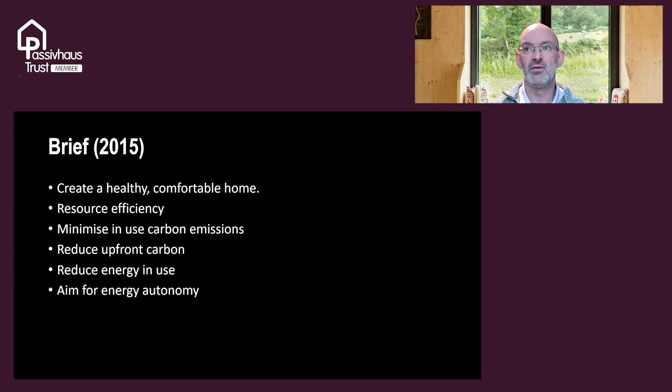So the basic brief from Paul and Sonny Shepherd was to create a healthy, comfortable home by converting an existing barn into their new residence, to focus upon resource efficiency. So we wanted to be thinking carefully about the materials that were being used and specified in the building, and in doing so, minimising upfront and in-use carbon emissions, minimising energy use, and with something of a view towards aiming for some kind of energy autonomy of sorts. This was a very loose brief that then, as we moved forward, we started to develop and refine into a strategy.

So, in terms of developing that strategy, in the words of Abraham Lincoln, if I had 9 hours to chop down a tree, I'd spend the first 6 sharpening my axe. So it's really a case of getting to grips with the core issues, and preparation is the most important phase. So getting that right for us in this particular case meant thinking about how Passivhaus EnerPHit could be brought into play. There's a few different approaches to that, which I'll outline a little bit later. And the reason that came in is because it provides and anchors a very good standard of health and well-being and comfort.

I have a little metaphor where that kind of health and well-being comes in cans, and that's comfort, air quality, and noise, should we say? So if we address that, and we can use the Passivhaus EnerPHit's low energy criteria to get the fabric right, then a lot of other good things will just flow out the back end of that, given the client's overall ambitions to really reduce carbon emissions and reduce energy bills.

As I say, we were then also looking at how we might use and reuse materials. So we went through what's a fairly common sort of framework there in terms of recognizing that we wanted to reduce the number of materials that were being involved where we could. We wanted to be able to reuse materials, and there's many examples of that in the project. Where we could, we wanted to repurpose materials if they couldn't be reused in a direct sense, and then also recycling rather than resulting in waste. I'll talk about that in more detail later on.

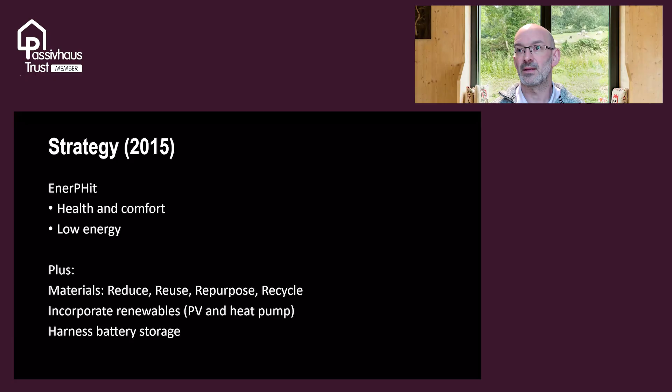So just to get into the strategy for certification a little bit more, when we start to talk about the Passivhaus EnerPHit or any retrofit for that matter, we've basically got three options that we're thinking about when we're dealing with the fabric. We've got internal insulation or external insulation, just to set those diametric poles there, and there's different factors that we need to consider, and then there's a hybrid zone whereby you might have one wall that could be internal wall insulation, another wall external wall insulation, for certain planning criteria or something like that.

And in this particular case, it was recognized that we were going to need to use some kind of internal insulation strategy because the planners had a very specific view about how a derelict barn should appear. I'll phrase that politely.

So when we then started to think about Passivhaus EnerPHit certification, we had two approaches that we could take. We could either go with the space heating demand method, which is a bit like Passivhaus insofar as we're trying to iron out the new build standard, targeting kilowatt hours per meter square per annum, in this case less than 25. Or we could use a component method, which would have meant that we weren't using such onerous U values to achieve the end goal. But the consequence of that would have been that to reduce the overall energy in use and the carbon emissions, we'd have ended up needing larger photovoltaic arrays, and there were question marks about whether it would reduce carbon emissions. I'll get onto that later.

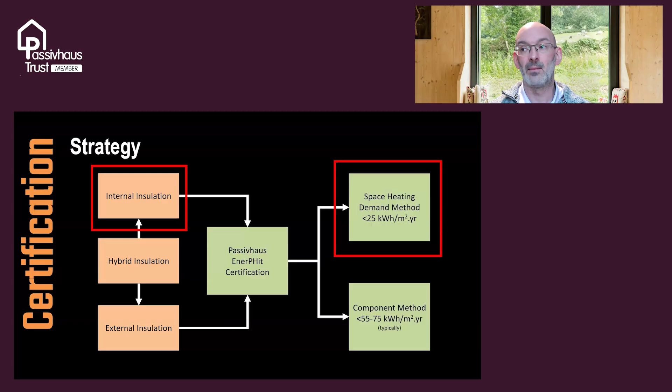In terms of seeking to achieve the space heating demand target in this particular case, we had the virtue of the fact that we had a barn with relatively clear structural spaces within it that we could then work within and introduce our strategies. So that's the context.

In terms of getting to grips with the before, where are we? Well, we're in the village of Lanchester, which is just outside of Durham and not too far from Newcastle, if you know the northeast. There's Shepherd's Barn itself and the land associated with that. And then just north of the site is Lanchester Community Gardens, which is also owned by the client and features in their larger sustainability strategy. And the site itself lies just outside the development boundary of Lanchester itself.

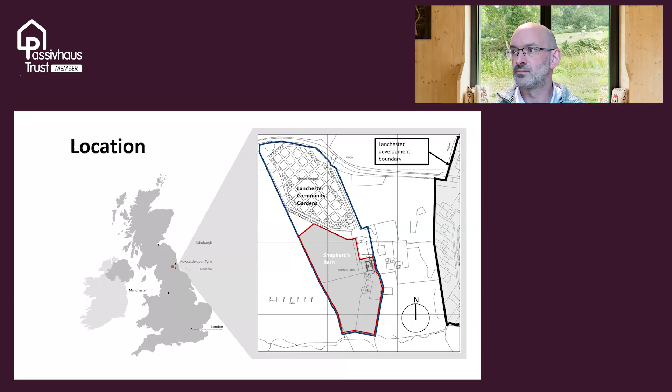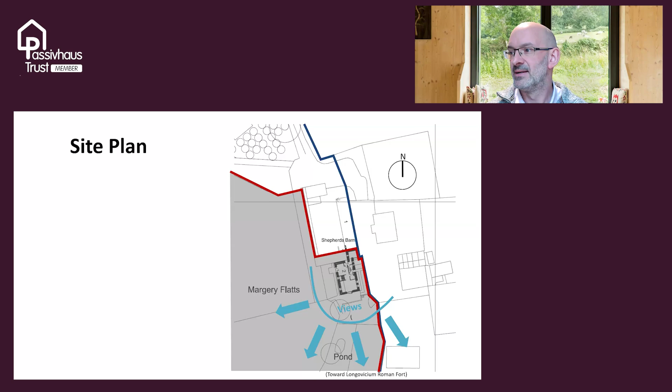The main views really are towards the south, with some over towards the west across some fields. If you're viewing south, then you look across a bit of a valley over to some Roman ruins from days gone by. So that kind of preserves that view in many respects.

The barn itself was nothing special at all, to be honest. It wasn't an architectural gem. It wasn't one of these barns that have very strong architectural characteristics in terms of vernacular. It was, to all intents and purposes, a barn that, as far as we can tell, was built in about the 1920s, 1930s, adapted in the 1950s, and then left to go derelict. So

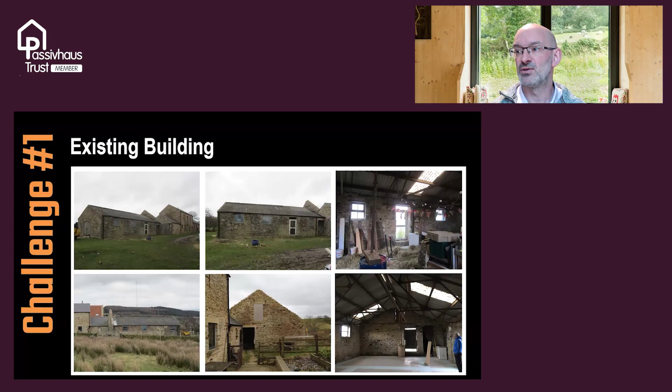the walls themselves were structurally unsound, and as you'll see later, there were major works rebuilding those to make them sound, and there was an asbestos roof, which also posed its own issues. We can't choose the form factor, the shape of the existing building, of course, and that poses specific challenges to us as passive house designers and architects when we're dealing with projects that are retrofits.

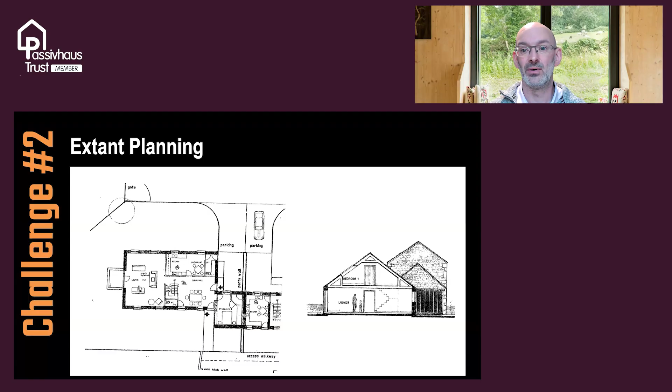And in this particular case, there was an existing planning permission for a dwelling to be formed on the site. Now, unfortunately, when you were a bit more rigorous in terms of looking at the space planning, it didn't actually work. So we had to redesign the floor plans and the sections to accommodate the client's spatial requirements.

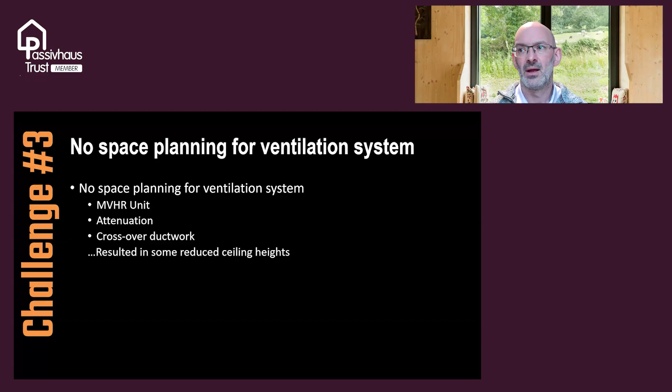And also in that process, the extant planning didn't have any accommodation for mechanical ventilation systems. So we again had to think about and develop strategies for how we can introduce and thread ductwork throughout the structure, and manage ceiling heights in an appropriate way.

Another factor that we wanted to consider was daylight. The barn itself had rather small windows and a limited number of them, in disadvantageous locations in terms of how you could develop a floor plan. And also, we didn't want to overglaze the building because we know that heavily glazed buildings are a lot more prone to overheating risks.

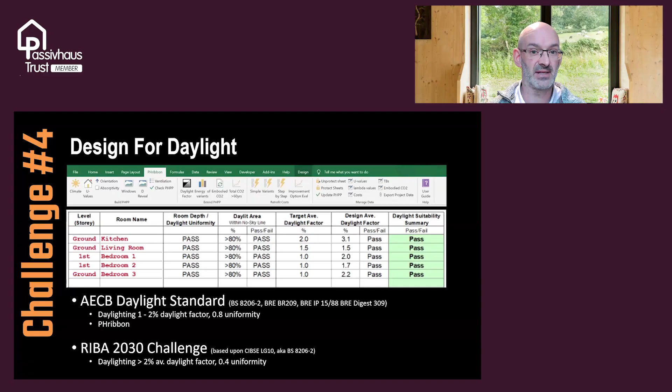So a number of years ago, I developed a daylight calculator that is used in our projects and available through the AECB, and we use that to right-size the windows to make sure there's good quality daylight, and that in doing so the glazing is not oversized and the risk of overheating is reduced. We can then feed that information across into the Passive House Planning Package, which is the software we use when we're designing any new build or any retrofit that's seeking to achieve the Passive House standard or indeed the AECB retrofit standards.

In terms of the performance criteria itself, these are the criteria that we were chasing. I won't get into much of the technical weeds on these for this presentation, though I can come back to it if you wish. But in terms of hitting the space heat demand target, we were seeking less than 25 kilowatt hours per metre square per annum. There's a primary energy demand target that we were seeking to satisfy for passive house criteria.

We wanted the overheating risk to be less than 10% to qualify for the EnerPHit or passive house standard. In general in the UK, we target a quality standard of less than 5% exceedance. And to be clear, overheating is said to occur when you exceed 25 degrees Celsius for more than 10% of the year.

Now, having worked on a number of passive house projects over the years, I tend to do building performance monitoring to find out whether there are improvements to our design process that can be integrated after the fact, so that as we move forwards, we can learn from that. And you'll see that the monitoring in this particular case showed that the design process worked successfully.

Thermal bridging, I won't go into the technical details on that, but the key thing for you to be aware of is that if we don't address thermal bridging, then 50% of the heat losses could be through the thermal bridges rather than through the walls, floors and roofs. And it's quite easy to go wrong on that. So Passivhaus EnerPHit has some good performance targets that we seek to achieve on that. And indeed, we achieved that in this particular case.

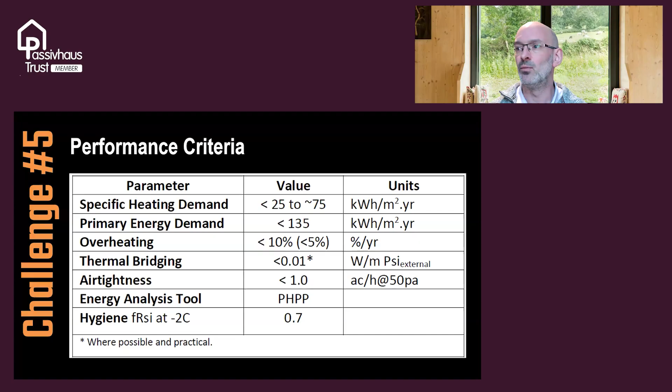And to avoid hygiene risks, so this is the risk of mold growth and things like that, we want to make sure that surface temperatures are sufficiently warm. And I won't get into the finer details of those criteria right now.

But the whole project is assessed using PHPP, the Passivhaus planning package. If you speak to anybody about PHPP, they'll tell you it's basically a big spreadsheet with many worksheets within it. And Passivhaus designers work through that, filling in all the relevant data, so that way we can determine an understanding of how the building will perform in the context of design.

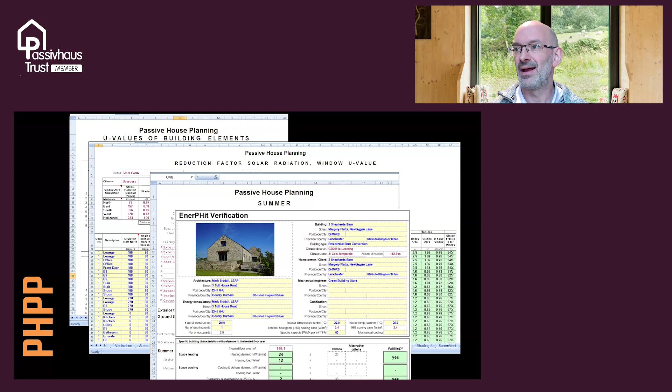Of course, how it performs in practice remains uncertain, and that's where the building performance evaluation kicks in to determine whether there's any performance gaps that we need to be aware of and how they may be managed.

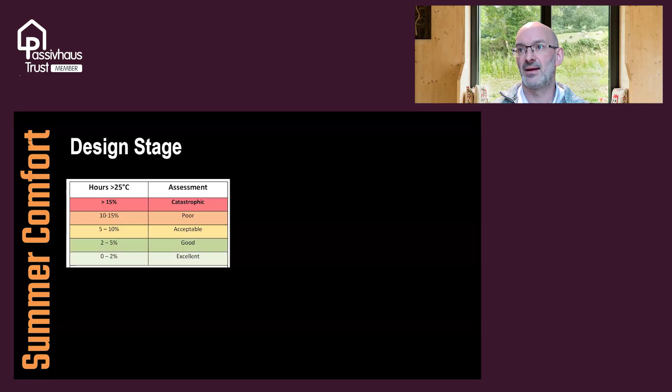Overheating risks. As I say, there's a scale here that we're dealing with. If we can keep it in the good to excellent quality, then we're in the right sort of place. Certainly that's achievable in the Northeast, as different projects that I've worked on have demonstrated in the past, and indeed, as you'll see later on, Shepherd's Barn achieves the same kind of goals there.

There's a handy little plugin that Passivhaus designers use that's been developed for and by the Passivhaus Trust that helps us to get a keener handle on overheating risks in properties. And you can see here that it flagged a couple of areas that we wanted to pay attention to, shall we say.

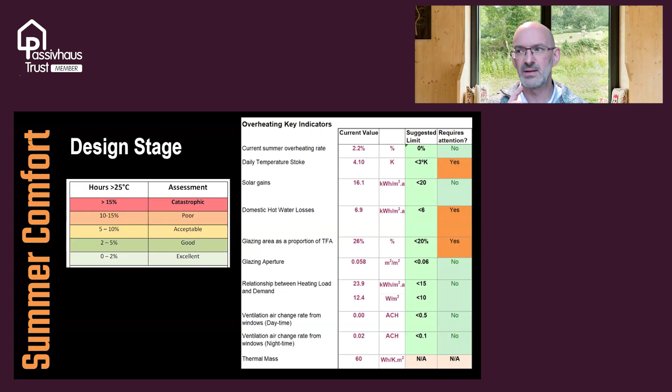Now, as it turns out, none of these were actually issues or concerns in reality because of the simple nature of the checklist. Where we're talking about the areas of glazing, we're a little bit up on what might be ideal, so to speak. But the simple tool here was not taking into account the deep shading that we had from the existing masonry walls, for instance. So there's swings and roundabouts in this, but basically we were able to conclude throughout the design process that the building was likely to perform well and acceptably.

One of the largest energy consumers within the building is actually your hot water. Once you've really reduced the space heating demand down, domestic hot water use is a major consideration. Now, we can't tell you how much water you should or should not use, but what we can do is design the plumbing systems to provide the best quality environment for you, so you get a nice warm shower in a short period of time with the right kind of flow rates that feels good. You get the right kind of pressure on your shoulders and it's a nice relaxing shower, whilst also reducing the dead legs and the wasted water in that process.

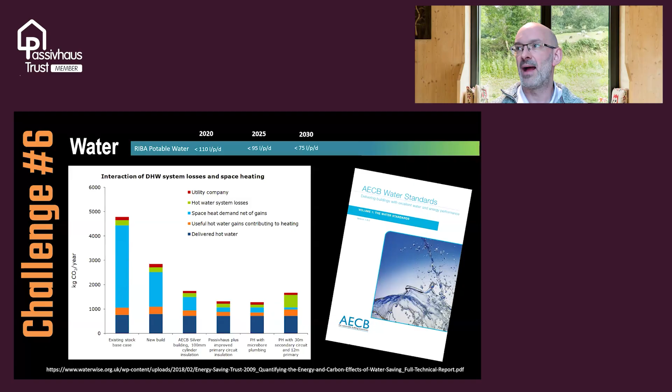So the AECB guidance that we use here provides us with some good best practice targets to work with, and during the course of working on the project, the RIBA developed their own kind of performance targets, and we can compare our project to those results as well.

Now, one of the conversations that we had about the construction was which construction technology should we use? Should we use timber frame or should we use masonry? Now, given that we've got a masonry building, that which was the barn, there was a certain sense in saying, well, perhaps we put a masonry building on the inside, a couple of layers of blockwork, and some cavity wall insulation, and everything would be fine. But in this particular case, we managed to determine that it was going to be more optimal for the reasons of structure as much as anything else to go with timber frame.

Furthermore, in this particular case, Paul and Sonny were going to manage the building contract themselves, and therefore having a prefabricated timber frame system meant that there was a lot less to go wrong during the course of the construction process and achieving their Passivhaus certification. Talking to Paul and Sonny, in preparation for this, they actually went on a Passivhaus tradesperson's course run by Coaction, and learned what they needed to know so that they could manage the construction project from a Passivhaus perspective in an appropriate way.

Times have changed a little bit in terms of how building regulations are structured, albeit in a handful of years. So it's more onerous now if you were trying to run a building project yourself in terms of health and safety issues and principal contractor requirements for building regulations. So just keep that one in the back of your mind.

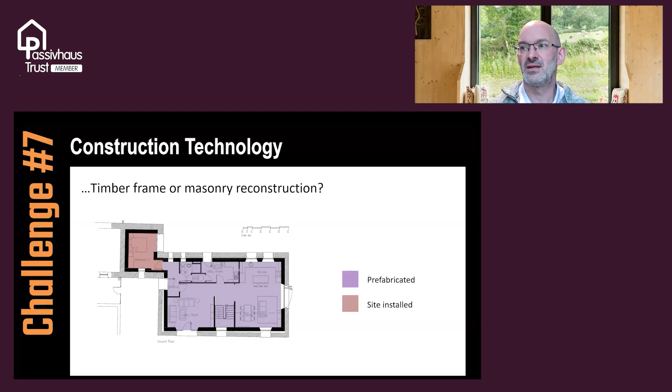So those are all of the frameworks that we were thinking about. I'm not going to get into the finest details of the space planning of the rooms.

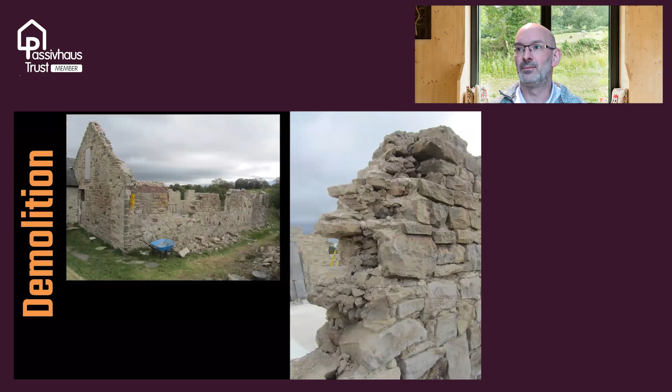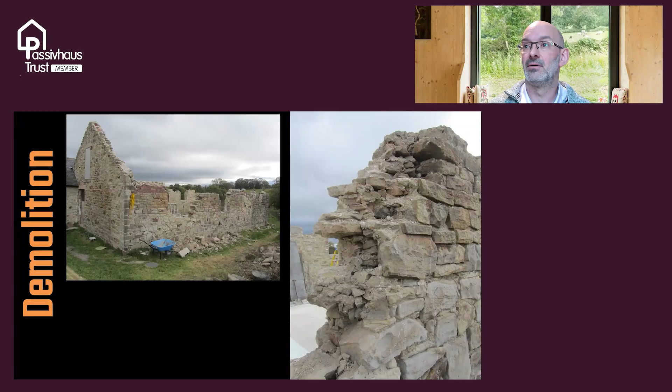So this is a way to create an EnerPHit barn conversion. It's not necessarily the way or the only way, but this is how we executed things in this particular case. So, as I say, the structural engineer determined that the walls of the barn were substandard and were likely to fall down in due course anyway.

So the demolition works had to be undertaken, and then reconstruction of the masonry walls. And of course, the old barn itself was not necessarily rectilinear. So we were putting a very precisely engineered timber frame inside a rather skew barn. And that meant we had cavities of varying widths inside. And that created, for architectural concerns, in terms of fire and things, various different concerns that we addressed in terms of cavity closures and things like that.

There was a concrete floor slab that was formed. We put down a continuous layer of insulation, and then put a concrete floor slab on top of that. And the engineer managed to get the floor slab to be very thin relative to what might have otherwise been the case. And part of that was how we designed the timber frame to avoid point loads. So we managed to reduce the amount of embodied carbon just through some simple good engineering.

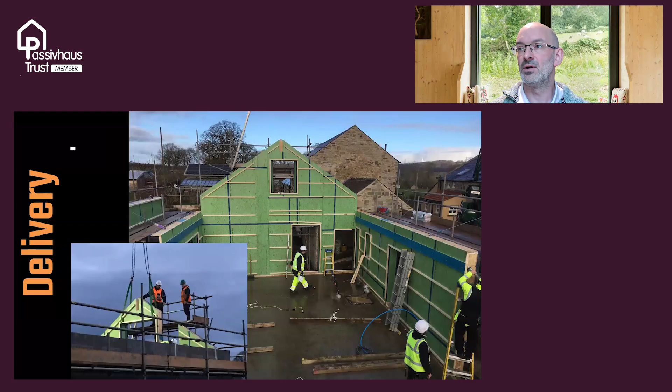Unfortunately, we couldn't design out the need for the concrete floor slab, but we did a good job at that. All in all, the timber frame was fabricated by Eden Insulation over in Cumbria, and then it was brought to site. And within a couple of days, they'd completed the erection of the house and started work installing the additional bit of timber frame in the property, that little offshot, the annex at the back.

So this is the completed timber frame. It's dropped into place, and the roof on, and we've immediately created a watertight site that Paul and Sonny could then start to manage. We also managed to decouple the construction program, so they could be fitting the building out whilst rebuilding the walls at the same time, and that helped to save time during the construction process as well.

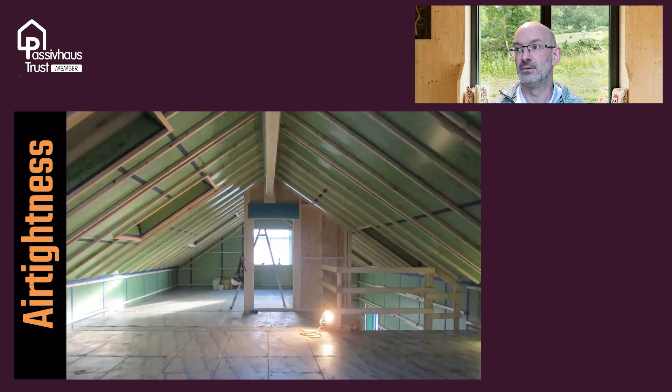One of the key things when we're designing any low energy building, but more particularly Passivhaus and EnerPHit, is we need to make sure that we've got good standards of airtightness designed in from the start. A lot of the research looking at how to develop and design airtight buildings was originally developed in the 1970s.

So I actually ended up getting books from Sweden or Canada to learn about how to deliver airtight buildings back in the day, because the information really didn't exist. Because when I was learning, it was before there were any passive house buildings in the UK. So a lot of the techniques that we use in passive house buildings today have got a very long proven history of how we deliver low energy and airtight design.

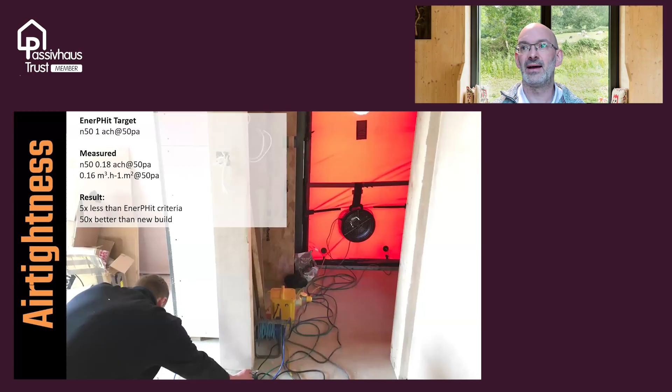Airtightness itself is assessed using a blower door fan. And as I say, the target here for EnerPHit is 1 air change per hour at 50 pascals. Now that 50 pascals is a difference in pressure between inside and outside. I'm not going to go into too much more detail than that. Key thing to recognise here is that in this particular case, for the retrofit, Paul and Sonny and their work managed to achieve 0.18 air changes per hour at 50 pascals.

So they got 5 times better than the EnerPHit criteria and around about 50 times better than required by building regs new build. So all in all, an amazing achievement. Partly, you could say we cheated. We smuggled a new building inside an existing barn, which I think there's a fair claim on that. I think that when you're retrofitting regular homes, the airtightness target of 1 is a distinct challenge, to be honest.

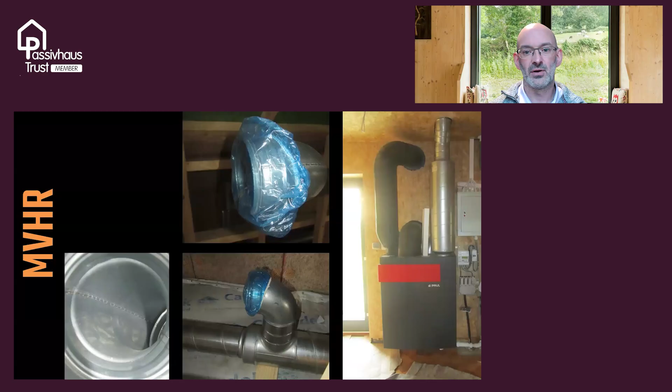Installing the mechanical ventilation with heat recovery, because once we've made a building sufficiently draught proof, we've got to make sure that we maintain good indoor air quality. So keeping the ventilation unit here with its intake and exhaust well insulated, the supply and extract ductwork, you can see on the right hand side the uninsulated ductwork with the attenuators to stop noise breakthrough into habitable rooms.

And as the building work's being undertaken, the ends of the ductwork get bagged off to stop or reduce the amount of debris that can get into the ducts themselves. Again, to help preserve good indoor air quality when the building's in use.

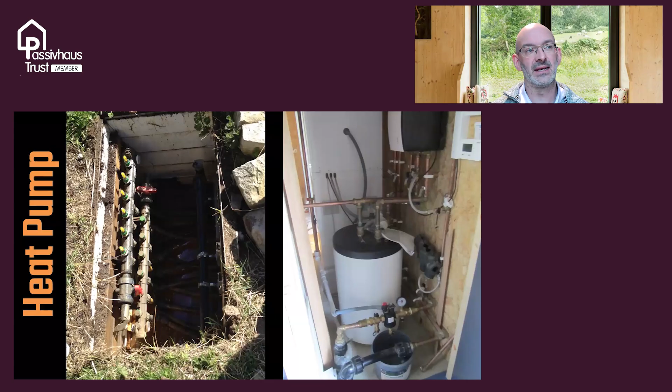The ground source heat pump, this was a little bit of a legacy, shall we say. Paul and Sonny had committed several thousands of pounds before I was even involved in the project into putting the slinky in the ground. And whilst we had many frank conversations about the pros and cons of whether or not we should be using a ground source heat pump or an air source heat pump, because they invested their money in the slinky and all those works already, they were committed to using a ground source heat pump.

As the project moved forwards, the timber frame itself, just to be clear, is insulated using wood fibre insulation, and the timber frame itself is timber. So there's a lot of low carbon, relatively low carbon at least, materials involved there that are also doing their bit to sequester carbon. I'm not going to make false claims about it. Achieving zero carbon credentials through using materials, that's a bit of a false claim, to be honest, and we'll talk a bit more about that later.

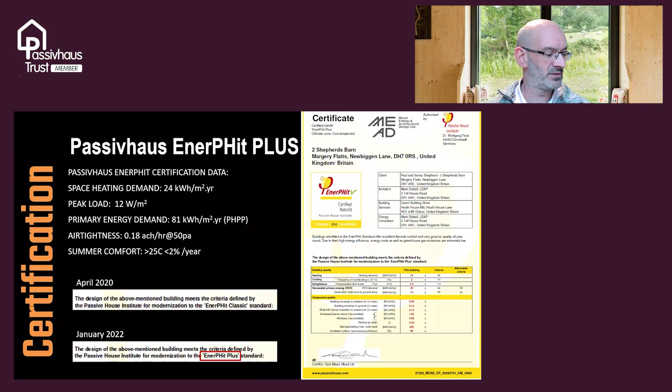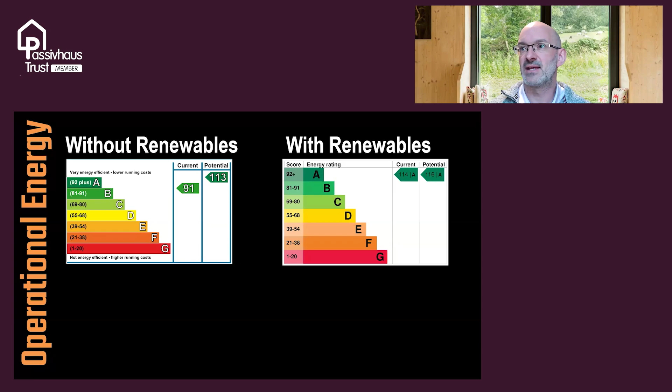And we achieved the passive house criteria, the EnerPHit Plus criteria. The peak load was 12 watts per meter square, and the space heating demand was 24 kilowatt hours per meter square per annum. So we managed to sneak in just below the bar there. Let's not underwrite or ignore the fact that the high standard air tightness helped us achieve that. So the project's A rated with renewables, as a SAP assessment would put it. And I won't get into the weeds on that for now.

There's an edible garden, which again helps to reduce the amount of carbon emissions from Paul and Sonny's lifestyle. There's an apiary, so Paul in his retirement now has his beehives and sells his honey to locals. And as I say, there's the Lanchester Community Gardens. The proof in the pudding, just mindful of the time here. There's some more information about the actual performance of the property, which we can get into depending on how your questions are structured. Okay, so I'm going to stop here, and then we can pick up with the questions, and then we can do a bit of the post-occupancy evaluation side of things afterwards if we have the time.

But I was just saying, Mark, it's incredible to imagine what a stunning product going from what was essentially a derelict pile of bricks, and I really love the edible garden and community garden. What a super end result. So we have had quite a lot of questions, and I'll go with the ones that have been upvoted most first. Alice is interested to hear your view on the component method, whether it still achieves a robust build, and how that deals with air tightness or thermal bridges.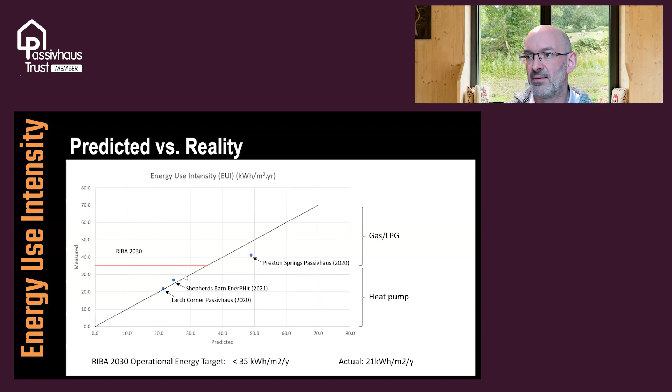What's also interesting is that the line of perfect correlation, should we say, between what we predicted and what happened in practice, would be this continuous black line there, and you can see that we're clustering along that line. So I'm fairly happy that Shepherd's Barn is doing what we would have wanted it to, all in all.

In terms of carbon emissions in use, what we can see here is that there are displaced emissions because of photovoltaics, and then there's actual in-use emissions because the property is connected to the national grid. And the fallacy is that a lot of people will talk about zero carbon buildings and how their building has no carbon emissions. It's an incorrect assumption. It's because people are not doing the proper accounting, and they think the numbers would suggest that you would end up being minus 1,000 kilos of carbon dioxide. So it's 1 ton. You kind of say it's clawing carbon emissions from the air, so to speak.

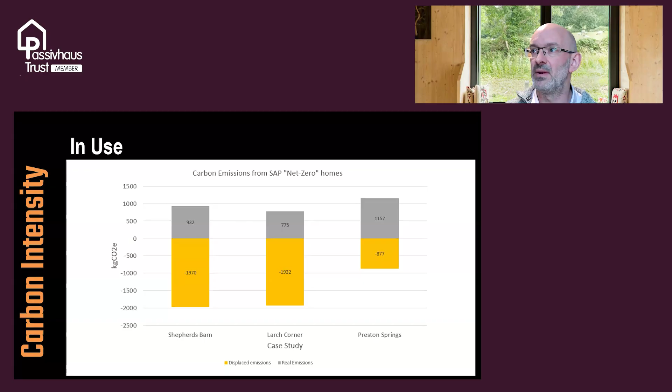Really, the property is resulting in getting on for a ton of carbon emissions per annum, but we're displacing nearly 2 tons of emissions from the grid overall. So it's doing some good for the world, but it's not the building that's doing that. It's tying it into the national grid. So what you can see here is another representation of this same story, whereby we've got our positives and negatives going on in terms of our import and export of energy.

And what we can see is that 68% of the carbon emissions of Shepherd's Barn occur during the winter. And that's because the photovoltaics don't generate enough electricity in the winter to cover all of the energy use. Though over the course of the whole year, we can argue the case that it's displacing all of these carbon emissions across the grid. And the utilization factor of the photovoltaics, we're using about 39% of it, and the rest has been sent out to the grid.

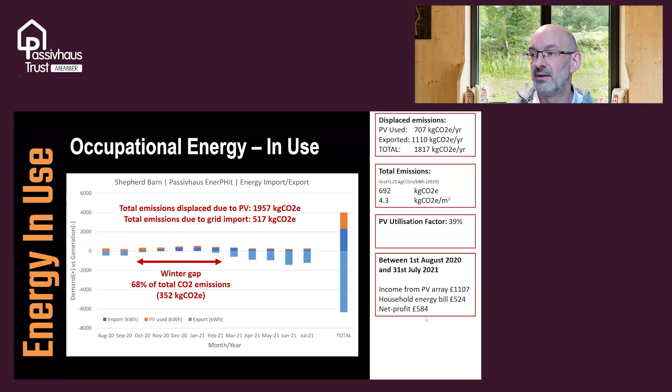And because of that, Paul and Sony generated over £1,000 worth of income from the photovoltaic array. Their household bill was £524. So by the end of the year, they're up £584. So they get paid to live in their house.

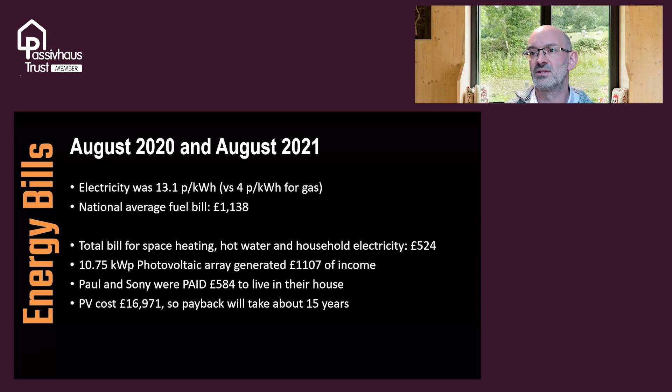Right, I'll just skip that one. We've covered that. In terms of comfort, this is summer comfort. The PHPP predicted that the house would exceed 25 degrees Celsius for 2% of the year, because of the right sizing of the windows and the shading provided by the thick external walls, all taken into account in PHPP. When we measured it in practice, it exceeded 25 degrees Celsius for 0.7% of the year, with the peak internal temperature in the west living room of 27.7 degrees Celsius. I was monitoring in 15-minute intervals or so, so I can't tell you quite how long that lasted, but that was the absolute peak that we recorded.

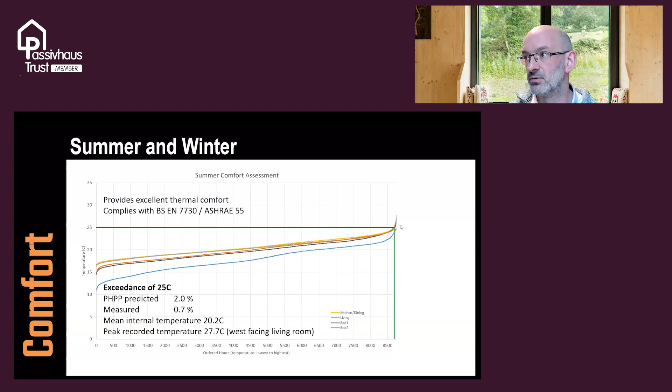This graph is basically all of the hours in the year and the temperatures on the vertical axis. And this is a very common occurrence that we get this kind of S curve, as it's known. You can see that there's just this little upwards trend, and we're all below the 25 degrees Celsius threshold, apart from this little tail over on the right hand side.

In terms of air quality, what we can see is that we stay within the ideal range for the majority of the time, and sometimes extend out into the acceptable range for a very limited period of time, and occasionally just for very short periods.

And this is where the humidity, so this is all tying back to the fact that we've got some very good levels of humidity inside. It's a very well ventilated home, so we can use the level of humidity as a proxy for air quality. Now we say a proxy because there's lots of factors involved in air quality. It's basically a chemical soup.

So I'm not going to say it's absolutely perfect. We don't know. We haven't monitored particulates, we haven't monitored different off-gassings of different chemicals or whatever else. But all in all, as we might compare it back to any other benchmarks, this is very much comparable, if not better than you'd expect to see in another passive house property, should we say.

There's a lot of evidence that shows that passive house standards of install for mechanical ventilation systems way exceeds anything that's done in industry, and even the poor quality installs that you get in industry are better than so-called natural ventilation or uncontrolled ventilation strategies.

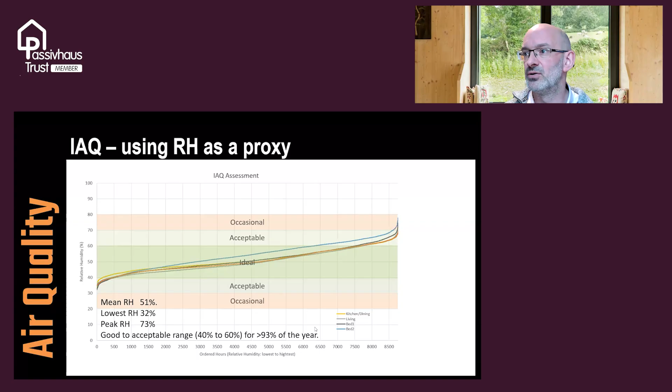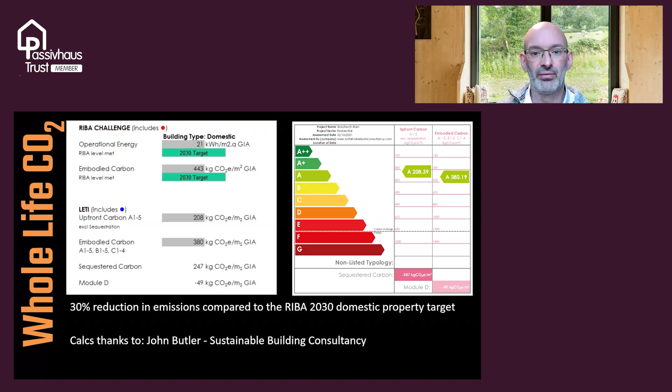We also looked at the amount of carbon emissions that arose during the construction, the embodied carbon or the upfront carbon, so to speak. We've got the targets from the RIBA 2030 challenge versus LETI, and what we can see is that when we're judging against the LETI standard here, the upfront carbon and the embodied carbon are both in this kind of A-rated classification that they have. So there's not a lot more that we could have done to really improve things in that regard.

So that's it. That's Paul and Sony sat outside, and I think we've covered all those bits. I don't know whether we've brought up any opportunities for more questions through that.